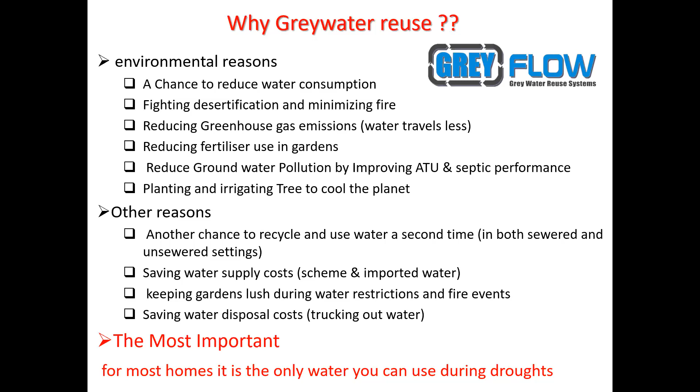We've encountered some of these applications too, but the most important is that for most homes, it's the only water you can use during droughts. Of course, if you're on bores or wells, you can use that water, but in general, most homes don't have access to these. And so the only water you can use during droughts to water your gardens is greywater.

Yeah, I'd like to make a differentiation. In Australia, we are quite clear, and I think in the US also, there is a clear distinction between greywater diversion and greywater treatment. Greywater diversion is water comes in and goes out into the garden. Okay, you don't store it, you don't hold it, you filter it, and you pump it out, or it goes through gravity. And usually the best way to actually distribute the water is, as far as we're concerned, drip irrigation.

In Australia, mulch basins, things like that are not seen very favorably. They're actually not allowed in some states. And the reason is that there's been some bad applications. Greywater treatment, you can use it in domestic, although it's not very economical in domestic applications. So most of our greywater treatments are for commercial applications.

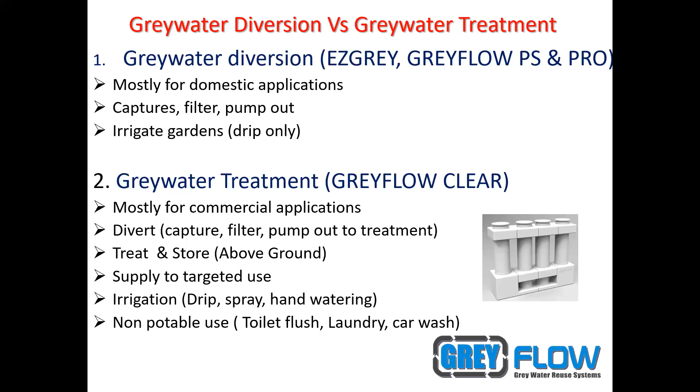But first step is we divert it, and usually we divert it at source, so I'll explain that, and then we treat it, and then we can store the water and supply it to target irrigation or non-potable use like toilet flush, laundry, car washes. This is a little table summarizing what are the standards in Australia.

Greywater diversion, these devices are, we call them GDDs, and they're up to 1,000 liters a day. You cannot store the water more than 24 hours. It's got to meet a certain plumbing standard. The water quality is not defined, and it can only be irrigated using substrata drip irrigation.

As for GTS, greywater treatment systems, basically you can use it everywhere if you want. So domestic and commercial application, you have unlimited daily flow. You can also store it as long as you want, but it does need to meet 3 different levels. Level 3, which is for drip irrigation. Level 2 is for all irrigation like sprinkler irrigation and toilet flushing, and level 1, which is a little more advanced, and it's for all non-potable water use, so like laundry reuse.

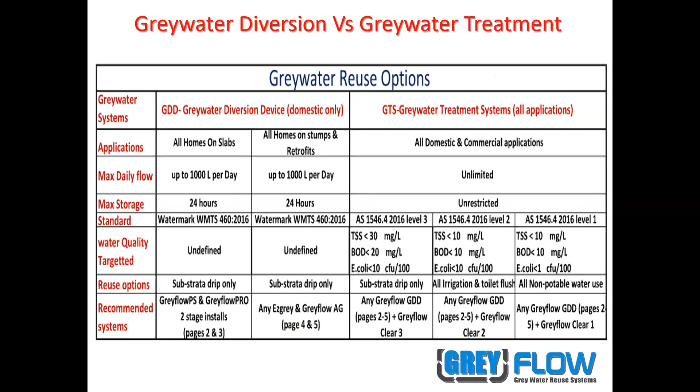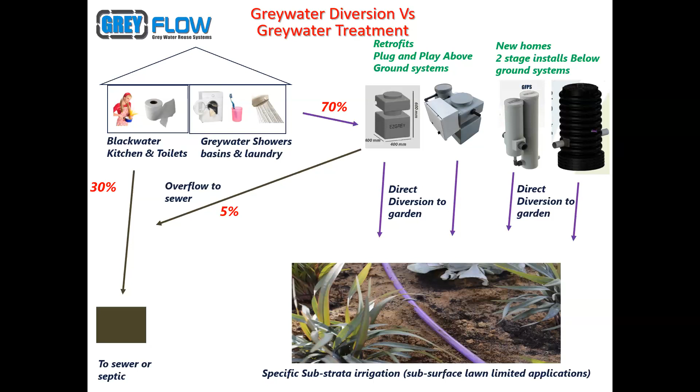The standard is to have an overflow. So if there is no power, if the pump fails or the filter blocks, then the water needs to be able to go back to the overflow, to the sewer or to the septic. But if you look at the different systems, they are all diversion systems, and then they irrigate subsurface drip.

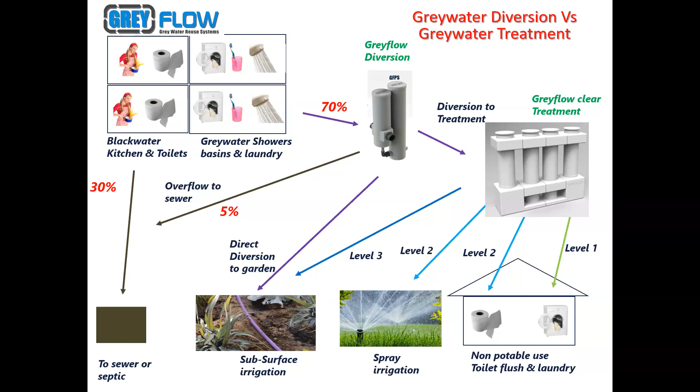Now, this is an illustration of greywater treatment we do. So greywater treatment is very similar, except that there is one more stage. Usually you capture the water again below ground or at the lowest level, and then you divert it into a treatment system. And then depending on the treatment system, you can drip irrigate it. If you go to level 2, you can spray irrigate, or you can use it for non-potable toilet flush and laundry.

Okay, now I'm gonna try to cover some of the things we've learned in Australia. So we're going to give you all the secrets we've found in Australia for the last 19 years, because we've been at it since 2004. First, working with small buffers. So that's a buffer tank.

So this is something that often when we start, people want to put the biggest tank possible, and then they install these large tanks, 300 gallons or 400 gallons tanks, and then it ends up smelling. The larger your tank, the more smell you'll get. So really, with greywater diversion, since you can't store the water more than 24 hours, there's no point having a big tank anyway. So water can go in and come out. Your real storage is your soil.

Also, we found that with greywater diversion, we only use vortex pumps, because with greywater diversion the water quality is quite poor. And as you know, closed impeller pumps give you very short life with poor water quality. So using vortex pumps is important. I'll talk about the two-stage installs for new homes on slabs, and also the plug and play retrofit systems for tiny homes or for homes on stumps.

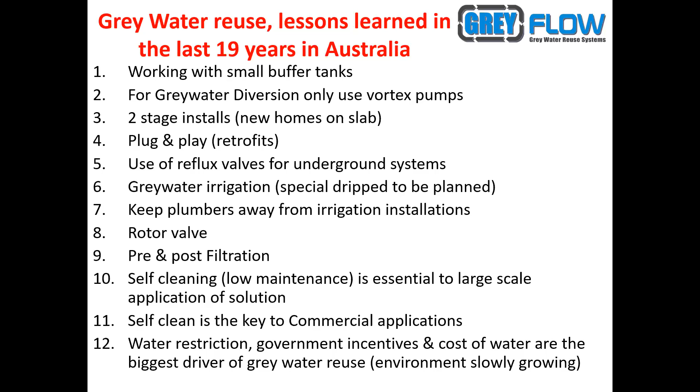Now, I'm just going to talk about, actually, I see there is a chat. Somebody's asking a question, but maybe I can wait. I'll have to read it later.

Okay. New homes on slabs. So generally, when you're building a house on slab, your greywater will be coming out underground. So what we've learned is that we need to capture it underground, of course, at source. And so we need to have a pit where we can access the greywater unit. The way we do new homes on slabs is a two-stage install. Usually when you build a house on slab, you do the plumbing about six months, maybe a little less or a little more, before you erect the house.

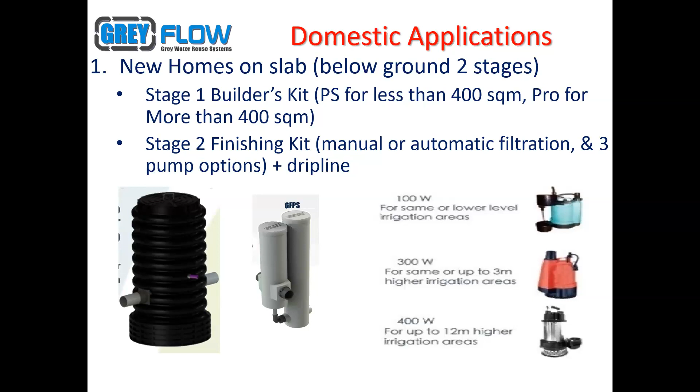While you're doing the plumbing, the best thing to do is to install what we call a builder's kit, the access pit. Stage two is later on, what we call the finishing kit, when you finish the house. You put in the pump and the irrigation, and you can then select your irrigation, and the irrigation and the pump size should match. So this is the way we do it in Australia. All new homes, we have what we call access pits or builder's kits. The builders call us, or a lot of builders specify, just install an access pit or a builder's kit. And the house is then greywater ready.

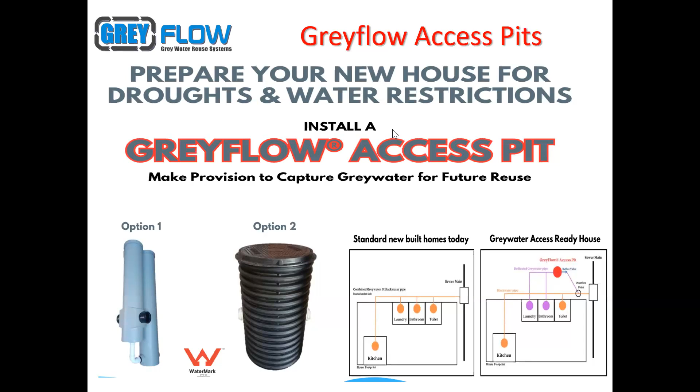And the only thing you need to do, no more plumbing, it's all underground, it's all covered. Then you can just drop in a pump and pump the water into the garden, or pump it into a treatment system and treat the water. But it means you have access. The problem is if you don't do that initially while you're building the house, you really don't have access to your greywater in future. And we're all building homes for 50 years at least. So it's not a bad idea to put in these access pits, just about $1,000 to $2,000, that you can connect to the plumbing, and then you've got your house greywater ready.

Now, why get the house greywater ready? It's very similar to why we should have greywater. We are the driest continent on Earth, of course. Drought and water restrictions are becoming more severe and frequent. Greywater is the only water that can be reused in times of drought. Watering the garden and flushing toilets with drinking water is not sustainable. Keeping plants alive and gardens green is essential to stopping desertification, reducing the impacts of fires, cooling the ambient temperature, and combating climate change.

A Greyflow access pit is cheap and easy to install at building stage, but virtually impossible or very expensive once the house is built. A house with a greywater access pit has a higher resale value in Australia. Reusing greywater for watering gardens and trees will become the norm in the near future, we believe so.

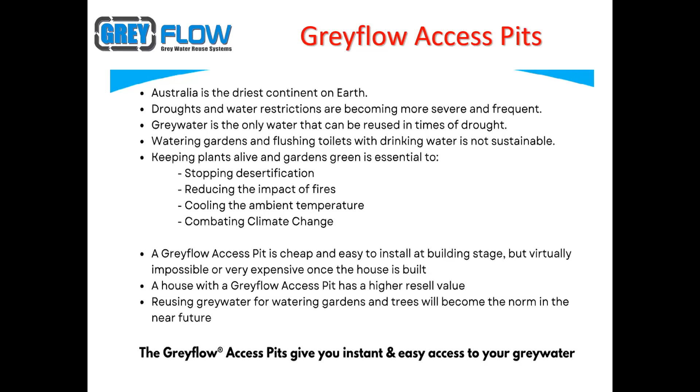Also, we know that technology improves all the time, so having that access to greywater may mean something in the future for people who want to treat the water. Right now, systems are a little expensive, but in the future they'd probably be a lot cheaper. So Greyflow access pits give you instant and easy access to your greywater. Now, that was for the new homes on slabs.

Now, generally, tiny homes, caravan parks and retrofits really require what we call above ground or partially buried plug and play diversion systems. These are plug and play, so they're not two-stage. We install them with a pump and everything all in there, and you just connect them to power and they'll start.

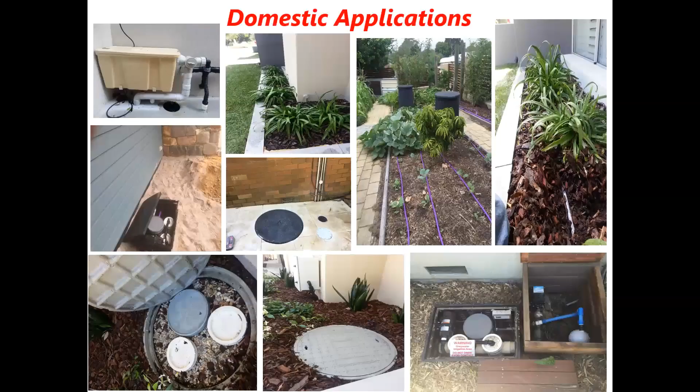We have also developed a series of domestic grease traps for the tiny home market. We do have a large tiny home market here in Australia and New Zealand, actually. I'm going to just show you some of the plug and play applications. So this is when your water is available at shallow. Again, this is all drip irrigation. In Australia, we do use a lot of drip for greywater because that's the standard.

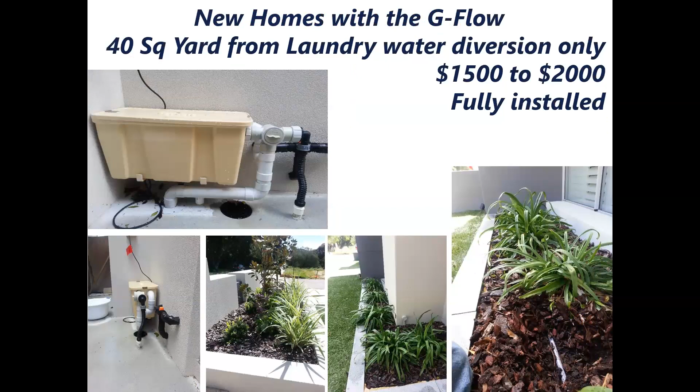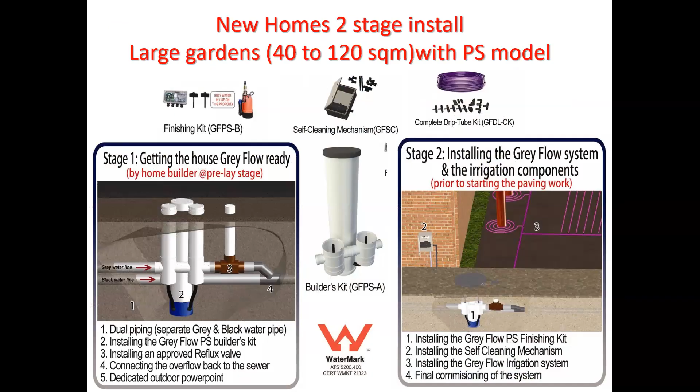We have different sizes of systems. We have the Greyflow PS and the Greyflow Pro, which are for different garden areas. The Greyflow Pro is for large gardens; the one before was the Greyflow PS. You can see an installation here. It's all underground. This is with the self-cleaning mechanism, so it backwashes automatically at the source. It throws the water back to sewer when the greywater comes in, to clean the water.

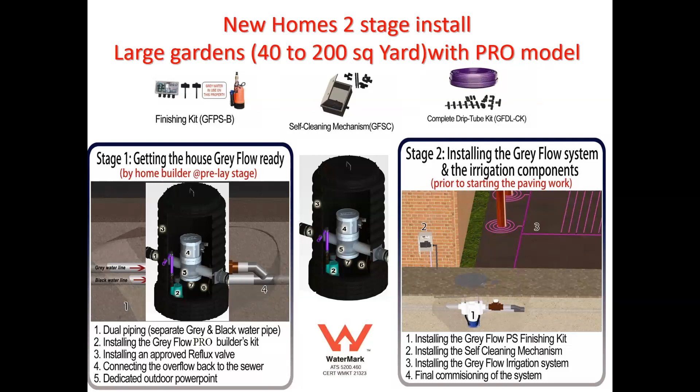We use only compressed air to backflush the filter, so we don't use water. We've done a lot of tests, and the best way to backflush the filters is with compressed air. This is for bigger systems. The Greyflow Pro, that's an installation. You can see it's flush, you don't see anything. The drip is put on the ground and then it's mulched over. In Australia, you should use about 100 millimeters or 4 inches of mulch. I believe the US is about 2 inches.

Now, these are the Greyflow diversion versus the Greyflow treatment. The US standard is NSF, and it compares to what we call level 2 in Australia, Australian Standard 1546.4 level 2. Now with the Greyflow diversion systems, first of all, we have no storage tanks and small buffer tanks. We have pre-filtration, so we filter before the pump. We never filter after the pump.

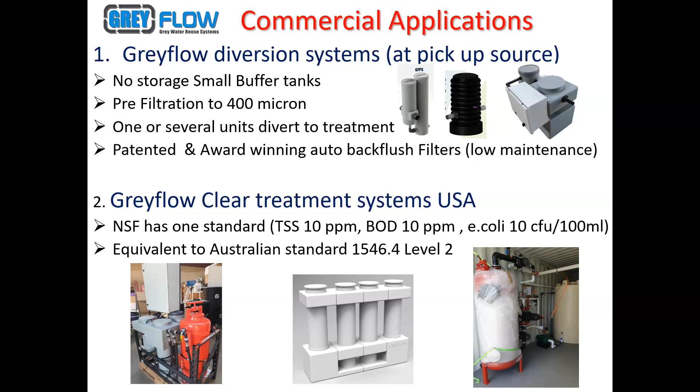The filter is not under pressure, the filter is on gravity, and so they're quite large. They're about 10 inch filters, and sometimes we have 2 in series, which increases the filtration area. We can have several systems diverting into a treatment system, and the backflush is the patented system that we have for the diversion. We do have automatic backflush also on the treatment system, but that I'll explain later.

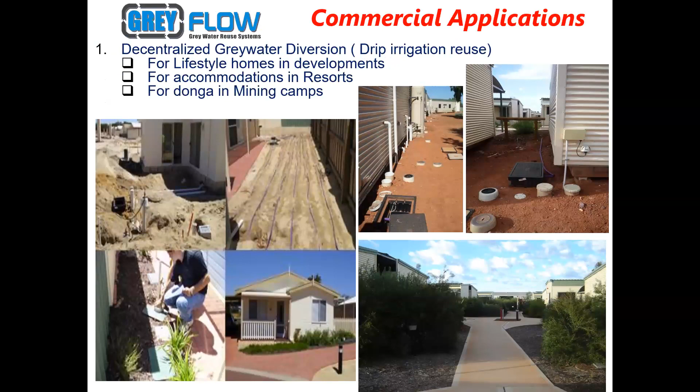Now I'm just going to show you a few applications. This is a decentralized greywater diversion system. There were about 350 homes in little retirement villages, and also some mining camps. We take the greywater from each house and we divert, so it's really decentralized. We use them also on dongas and accommodation in resorts. We've done a few projects like this. This is the one in a mining camp.

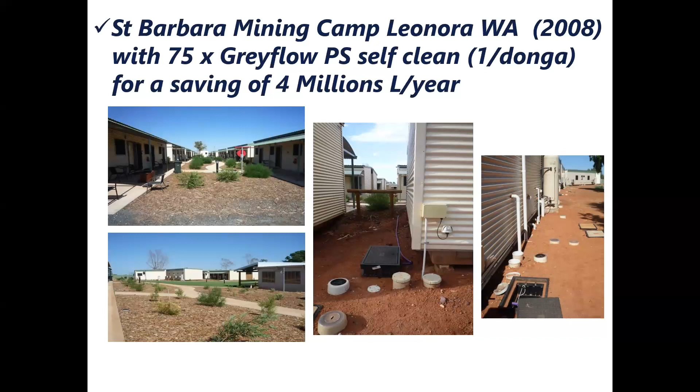As you can see, pretty desertic, 50 degrees Celsius outside, so over 120 degrees Fahrenheit, I think. We were using the shower water to green up the camp. This is when we installed it, this is later on, and this is after a few years. All this vegetation basically cools the camp. Also, the owners get a rebate on their sewer fees because they are not throwing the water to sewer; they are reusing the water to irrigate.

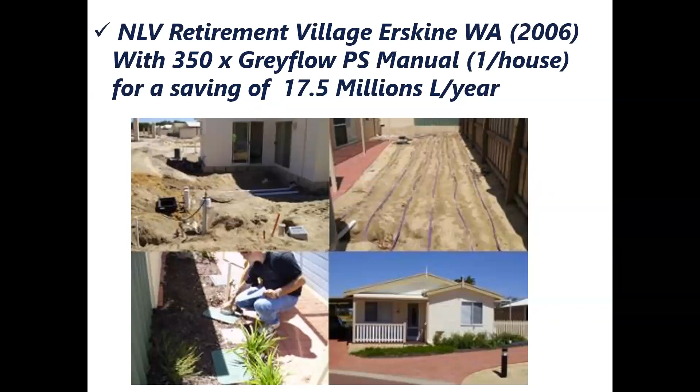Again, this was the little lifestyle village. You can see the amount of water that we can save with 350 homes: 17 million liters a year. Divided by 4 in gallons, that's about 4 or 5 million gallons a year.

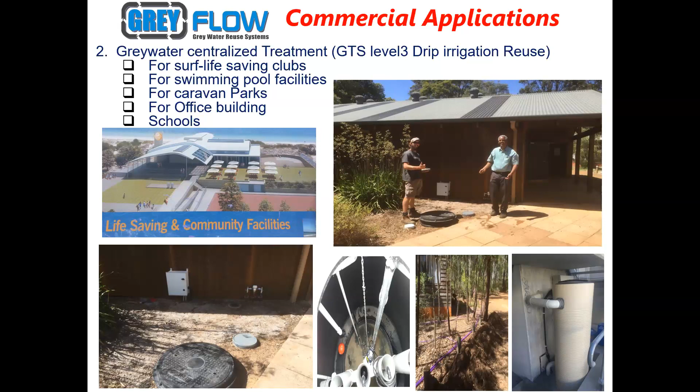Centralized treatment system. This we've done in caravan parks, in surf life saving clubs, office buildings. What we do is we pick up the water and we pump it into a centralized place. First of all, we divert it from underground to a centralized place, and then we treat it, we store it, and then we reuse it. Now, this one is mostly for gardens, so reusing it in gardens.

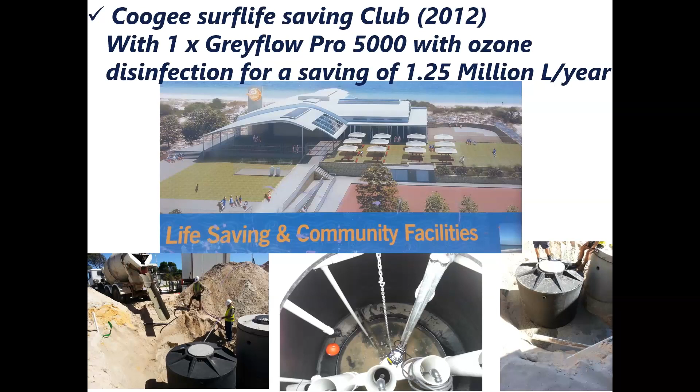However, this was a surf life saving club, sorry, I'll show you this one. This was in Coogee in WA. These are for buildings. So we use the car park location, and then we put tanks there and we capture shower water, laundry water, and then we can irrigate the gardens around the building.

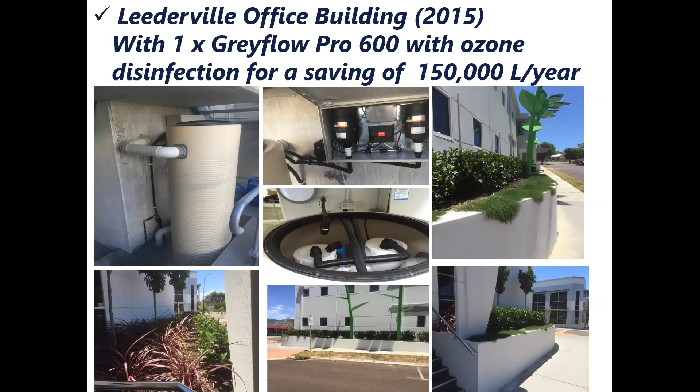You don't need to have a bore or a well to irrigate, or use town water to irrigate the area, which means that you can keep it green during droughts where water restrictions are there. Sometimes the water restrictions can be quite tough. Oops.

Yeah, this is actually a caravan park. We used that because their aerobic treatment plant was not performing properly. By diverting the gray water from the common showers, because all the showers are in one place, and irrigating across, we were able to actually restore the performance of the aerobic treatment unit, because it's not on sewer, it's on a treatment system, and so the water quality came back to what it needed to be.

The problem with gray water, it's got a lot of soap and it kills bacteria. So the aerobic treatment plants, which are based on aerobic treatment and bacteria growth, get a shock when they get too much gray water and they don't perform properly. So by just removing the gray water, this is why in New Zealand we sell a lot more systems, because of the environmental impact of just removing the soapy water, which has very little nutrients.

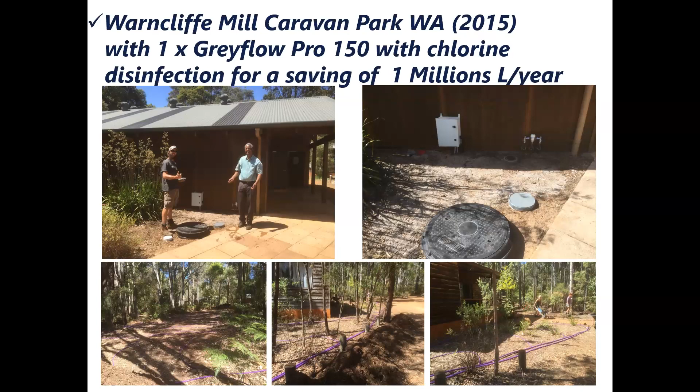However, the septic water, the black water, has a lot of nutrients, but the septic tanks and the ATUs, first, they get less loading. Second, they've got more retention time to do the job they need to do. So we find that actually by removing the gray water, they perform very well, much better.

Okay, these are centralized treatment systems for apartment buildings, for resorts, or if you want to reuse for toilet flush, or municipalities generally, or if people want to sprinkle the water, not drip the water, we need to meet the same as the NSF standard, which is 10, 10, 10: 10 TSS, 10 BOD, and 10 E. coli.

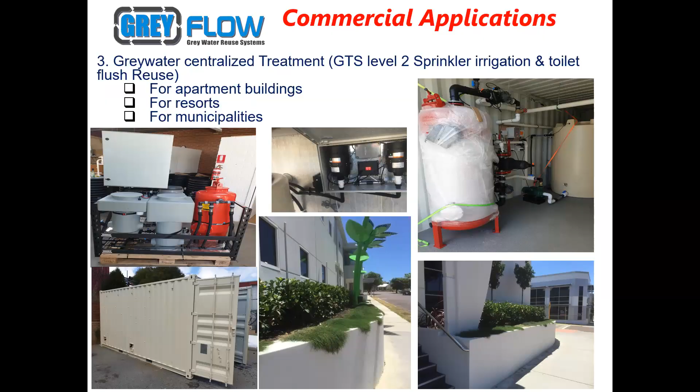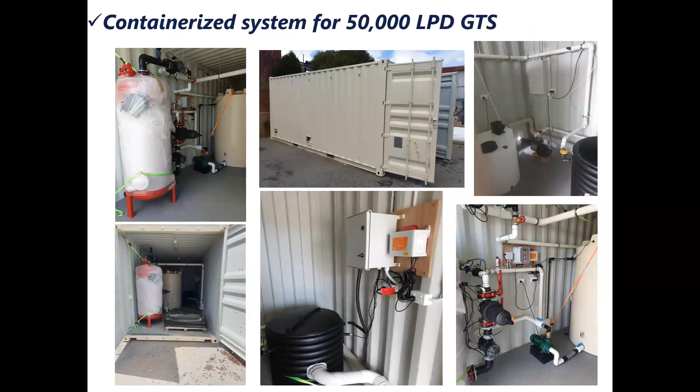This is a little palletized unit that actually treats the water to that standard. And these are containerized systems that we built. They go on site, they go into mining camps, and they basically treat the water to a certain level in order to be able to reuse it for flushing toilets.

I'm just going to cover a little bit. I'm going to try to finish a little early so I can have more time for questions, because I know that usually there are quite a lot of questions. But I'm going to give you a little understanding of drip irrigation versus mulch basins and things like that. So with drip irrigation, your water is spread a lot better.

But there are restrictions also. So in Australia, for example, you've got setbacks from buildings, you've got setbacks from fences. You cannot water your verges. You can only water what's inside your property. And depending whether the soil is gravel or loamy, you can apply a certain amount.

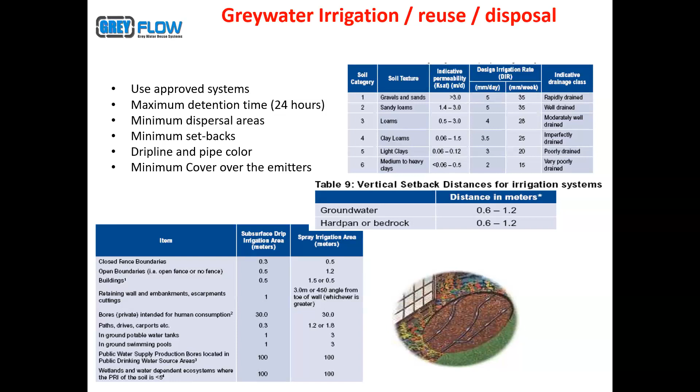So we usually help people size their gray water irrigation based on the type of soil they have and everything. Now, we don't usually test the soil, but rough information from the site will give us approximately what type of soil they have, and then we'll say, okay, this is the square meterage that you need to cover. Also, the setbacks from the homes are 0.5 meter, so about half a yard. From the boundary, it's about a third of a yard, so it's not a lot, and that's for the drip system.

In terms of the drip system we use, first of all, the pre-filters we use are down to 400 micron or 40 mesh. We don't go smaller, because once we get smaller, it's a lot more maintenance. We've been testing that for quite some time, and we found that actually that's the optimum pre-filtration.

Also, because we're using 400 micron filtration, the drip line that we use has to be able to cater for that type of water. And we use, again, purple or lilac color as a standard, which is probably an international standard now. And yes, we irrigate through the drip line. We have what we call run length restrictions, like you can't run the drip line more than a certain length, but you can put as many as you want.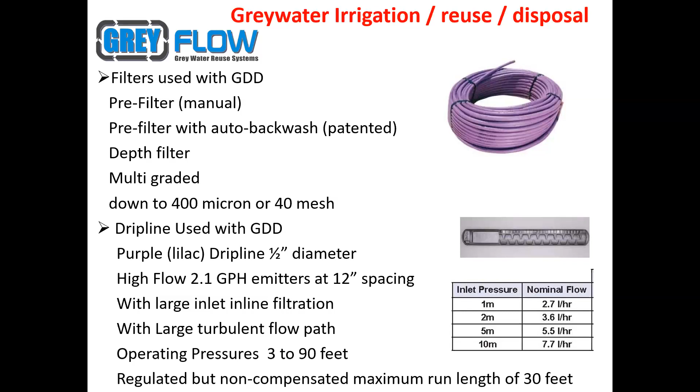You need feeder pipes, and the drip lines are turbulent flow path, and generally the inline drip lines are the ones we prefer rather than the drip emitters. Drip emitters seem to have a very small inlet, whereas drip lines seem to have a very large inlet passage into the emitter, into the turbulent labyrinth, and that's what we prefer, and we found that actually performance is much better.

In terms of controlling stations, we use indexing valves. We don't use solenoid valves because the water at that level of treatment is actually quite dirty, and the plunger on the solenoid valve will block. And we've tried quite a bit. You can use motorized valves if you want. They're a lot more expensive, but alternatively, we use what we call indexing valves.

There are some that are made in the US, actually, K-Rain and Fimco. But we found the ones that are more accurate are the volumetric ones, the ones we actually manufacture ourselves. First of all, they operate at very low pressure. Since we're using a vortex pump, we don't have very high pressure on the systems, and they can give us 6 stations, and they'll go from zone to zone. So there is 1 inlet and 6 outlets, and they'll go into different stations.

Now, the key with the volumetric indexing valve is basically they'll give you a certain volume. Let's say you can set it up for 14 gallons per zone. So let's say you irrigate and give 7 gallons, and then the next day it'll continue and finish its 14 gallons before it moves into the next station. It's a volumetric based one. Using different nozzles, we are able to actually make it turn at 28 gallons indexing. And it has 6 outlets.

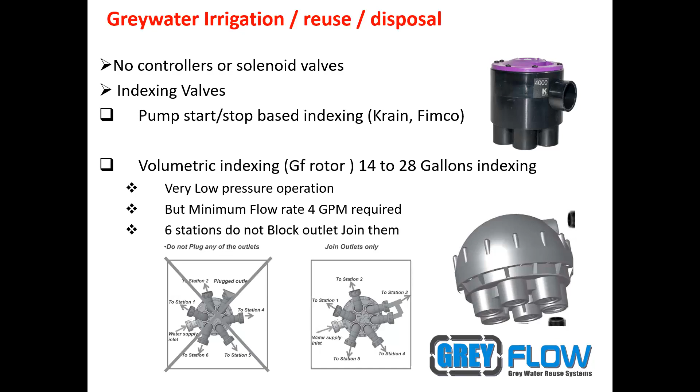So this gives you a summary of the irrigation layout. And we believe that actually the irrigation is as important as the greywater diversion itself. If your irrigation is not set up properly, your system will not work. We've had enough experience in terms of longevity of the systems. When people don't put enough drip line, the pumps suffer. When they don't have good feeder pipe size, there is too much head loss, and vortex pumps already don't give you so much head. So you tend to lose a lot of the head you already have, and the drip lines operate at very, very low pressure.

We usually recommend, again, our 400 micron filtration. We have at least a 1 inch feeder pipe from the diverter to the garden. That's at the domestic level, of course. When we get to commercial, it's different. And also when we go to treatment it's different, because once we treat the water, we use all types of drip line. You can use solenoid valves. But with greywater diversion, we do not, because the water quality is not good enough.